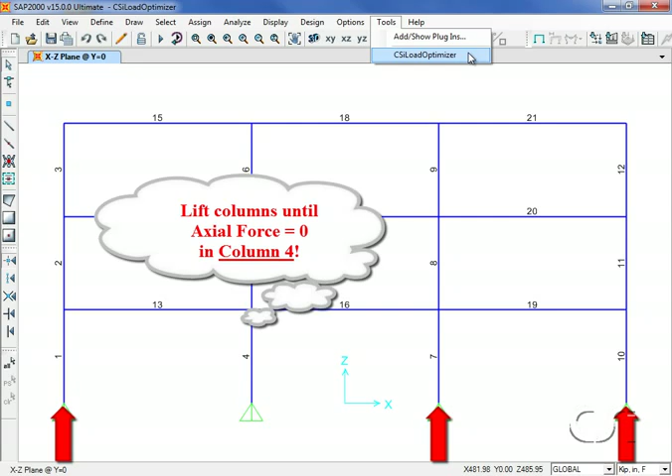In order to do this, we will lift the other columns at their bases until the axial force in column 4 is 0. The displacement of the column bases will be the variables, and the axial force in column 4 the goal.

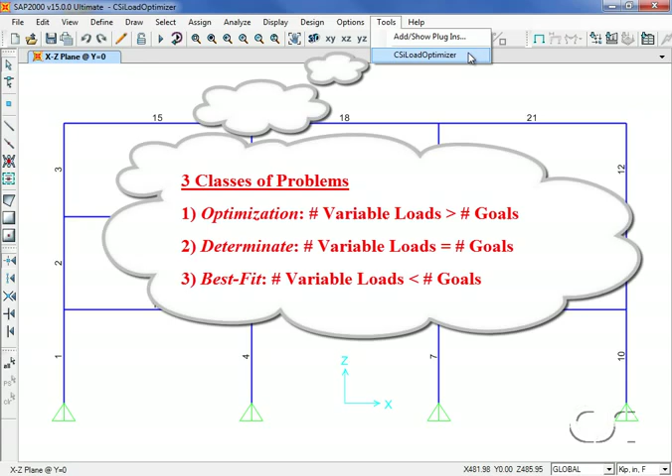When using the CSI Load Optimizer, there are 3 classes of problems that can be solved: optimization, where the number of variable loads exceeds the number of goals; determinate, where the number of variable loads equals the number of goals; and best fit, where the number of variable loads is less than the number of goals. Because we have 3 variables and 1 goal, our example will be an optimization problem.

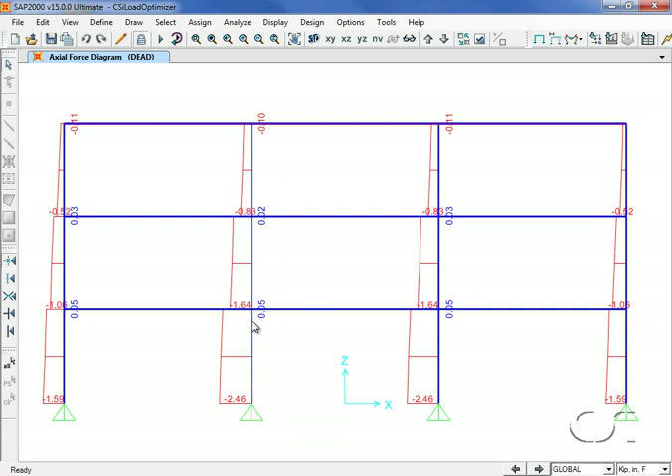This is the axial force diagram for the dead load case. Note that the maximum axial force is 2.46 kips in compression. A right click on column 4 shows that the current axial force at the top is 1.64 kips. We will set a value of 0 for our optimization target goal at this location.

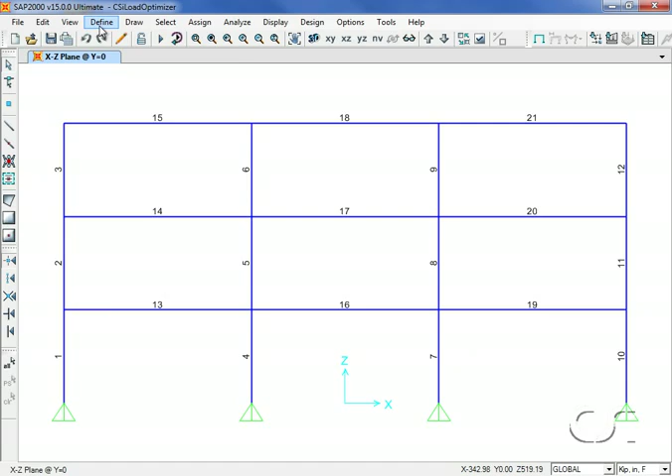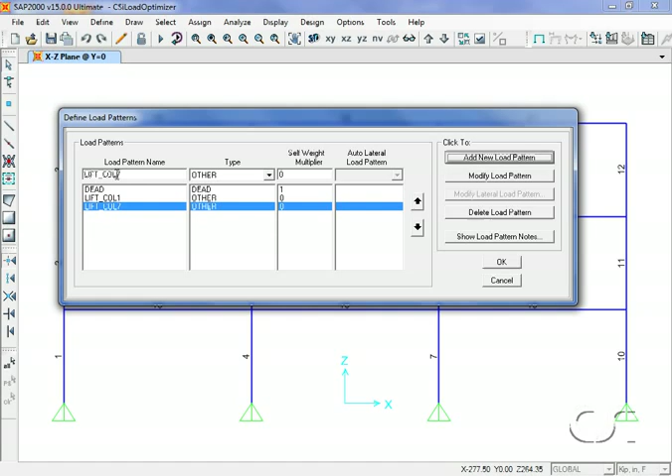We start by defining load patterns that will be used to assign the column base displacements. We will have a total of 3: called lift column 1, lift column 7, and lift column 10. Note that we also have a dead load pattern with self-weight.

Next, we select the base of the first column so that we may apply a displacement loading. Using the lift column 1 pattern, we will assign a displacement of 0.001 in the Z or up direction. The displacement will be scaled when optimizing to reach the target axial load in column 4.

We repeat this process at the other 2 columns we will be lifting.

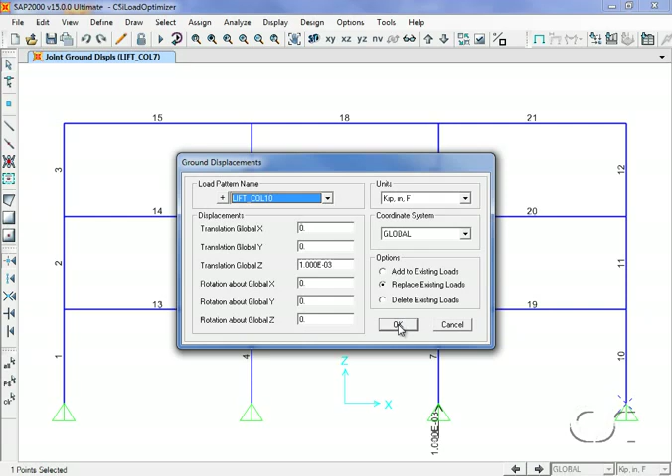Next, we will create a linear load case where we combine the dead load case with all 3 of our column displacement cases. We will call this case dead plus lift. We will assign a factor of 1 to the dead load case, but the displacement cases will all have a factor of 0. The actual factors required to reach our target force will be determined by the optimizer.

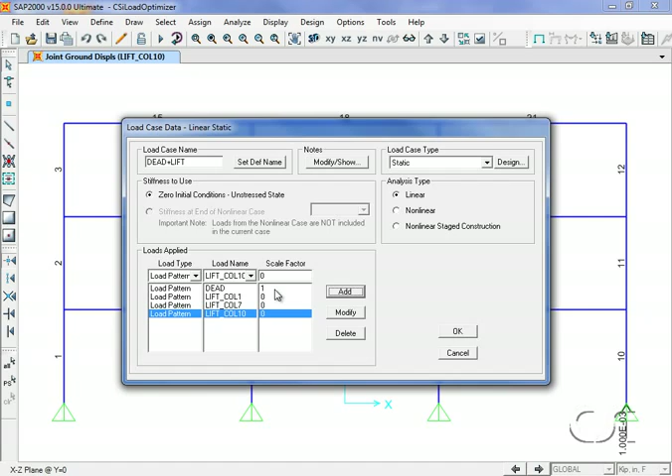Before we start the CSI Load Optimizer, we will switch to the standard solver. Using the standard or advanced solver for optimization may yield faster solutions.

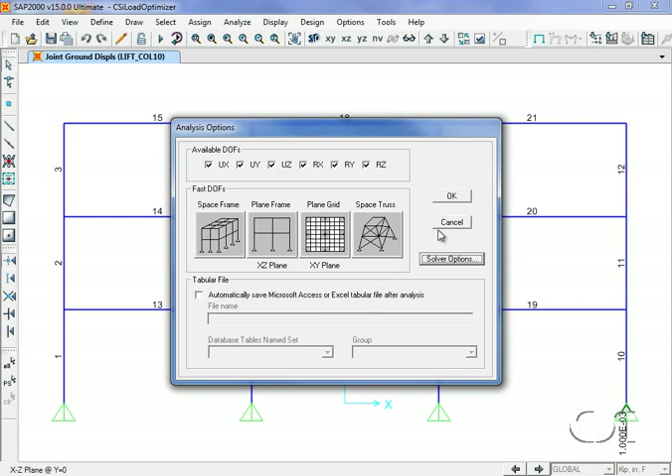Next, we move on to the optimizer, which can be found under Tools. The name shown on this form is appended onto the main file name to indicate a load optimizer file. The load case type for this example is linear static, and the load case will be dead plus lift. Note how the load assignments table is automatically populated with our displacement variable loads.

We need to switch the dead load case to fixed, as the dead load should not be one of our variables.

Next, we will define our goals, which for this model will be axial load at the top of column 4. End J is the top of the column. Our target value for the axial load will be 0. Note that we now have 3 variables and 1 goal.

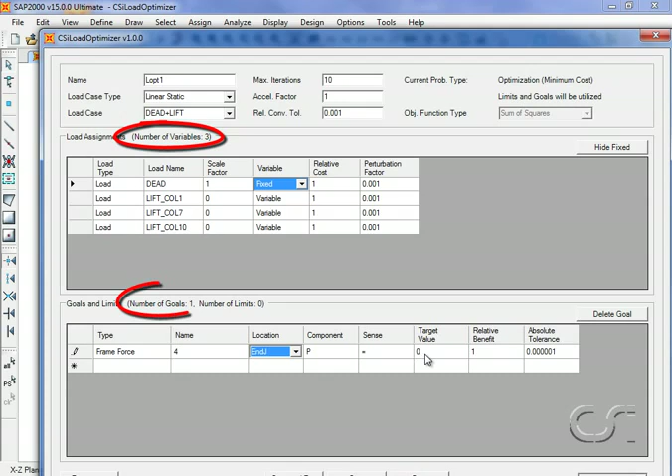We can now click the Save and Run button. This will start the optimization. Note that LOPT1 has been appended to the file name to indicate an optimization case. Optimizations can take significant time.

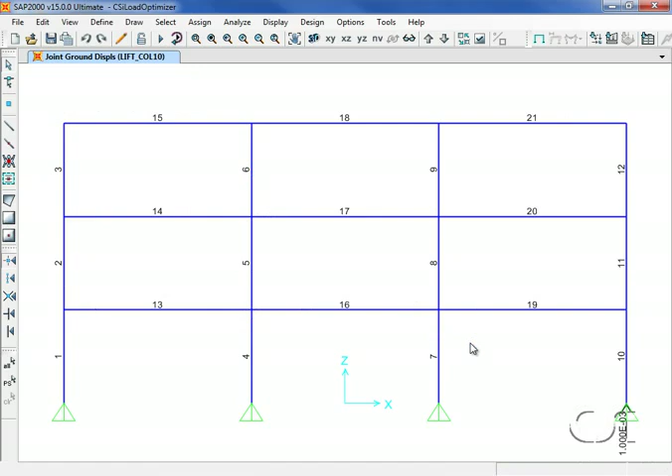This message lets us know that the optimization is complete. The current display shows the displaced shape for the dead plus lift optimizer case. It is obvious that columns 1 and 7 are lifted the most.

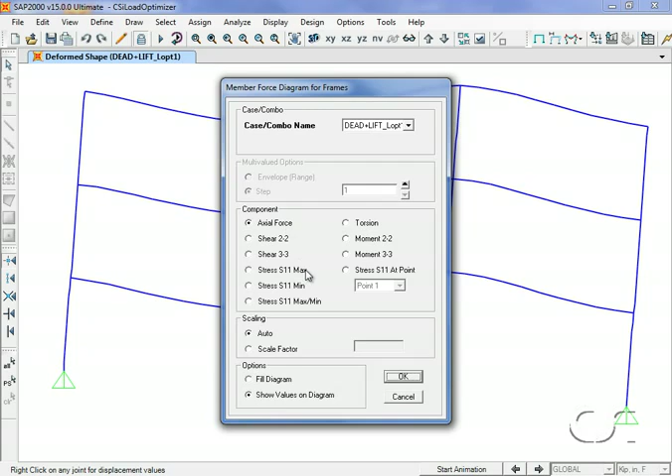Next, we will switch to a display showing the axial loads for the case at the end of the optimization. Note that LOPT1 has been appended to denote a load optimizer case. Right-clicking on column 4, we can see that the axial load is virtually 0 at the top, which was our target. Having 0 load on the column allows it to easily be removed from the structure.

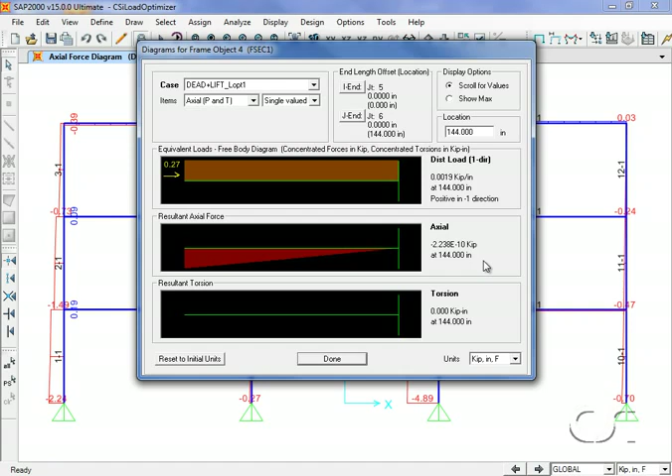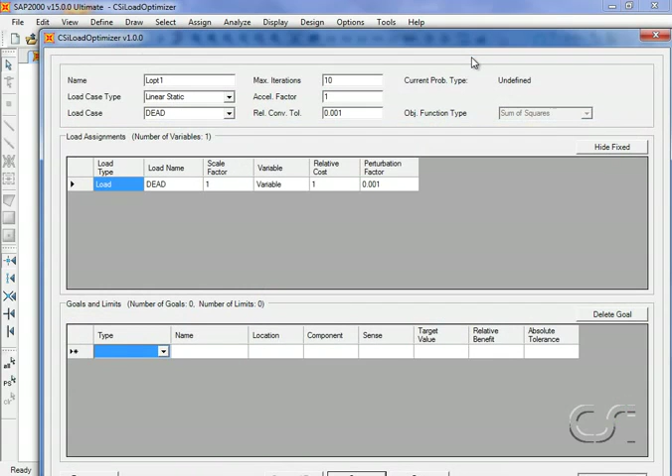Next, we will modify our optimization so that the axial load in column 7 will not exceed 3 kips in compression. We do this by returning to the CSiLoadOptimizer, opening our previous load optimizer file, saving it with a new name, and then adding a limit in our goals and limit area.

Here, we will specify that the axial force in frame 7 should be greater than or equal to -3.

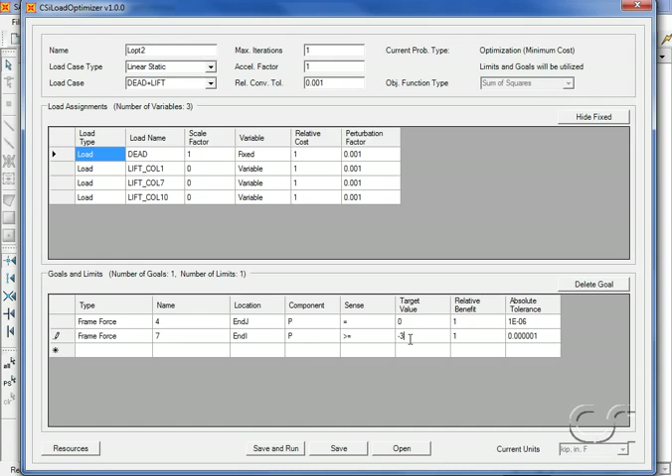We click the Save and Run button to start the optimization.

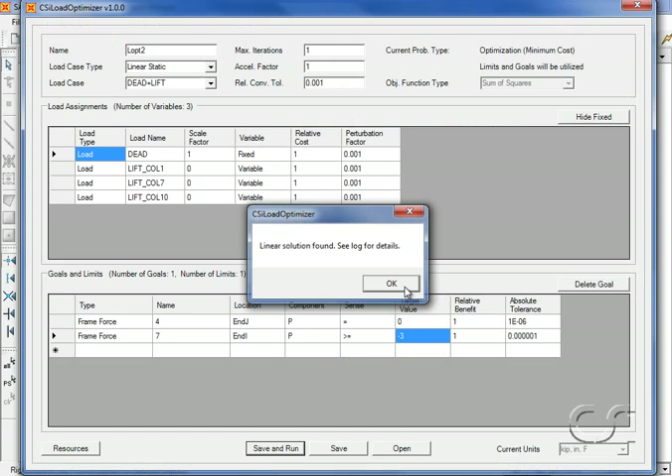We will now switch the display to show the axial forces for our second optimization case. We can see how the axial forces have changed in the second optimization run. Column 7 is now limited to 3 kips in compression, while the lifting forces in the 2 outside columns have increased to compensate for column 7's decrease.

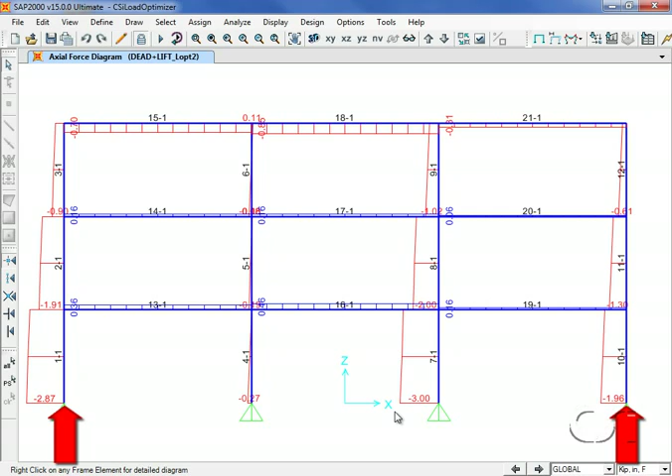Remember that the axial forces in the columns cannot exceed the dead load of the structure and must satisfy equilibrium. This completes this tutorial on the CSiLoadOptimizer.